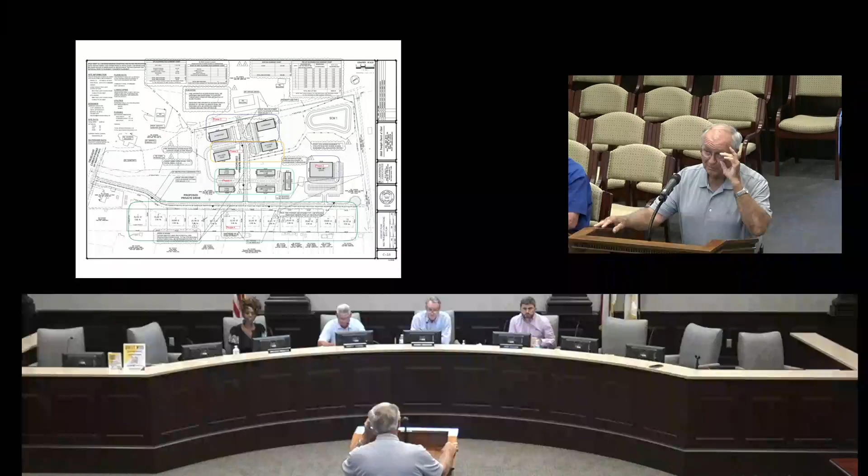Good afternoon, my name is Mike McGee. I have been a member of the Shiloh True Light Church for about 54 years, and a minister there for 21 years. As you can see, we have been blessed with a lot of property there over the years. We have purchased for use that we use a lot of it in the school that we have there. We have approximately 150 acres on our campus.

And we have been looking at it now for the last 3 years. So what can we do with some of this to help some families and children? That's the goal - what we can do to help somebody that doesn't have the same opportunity or doesn't have what some of us may have. And we started looking at it and we said, okay, what can we do to help someone like a single mom that maybe is homeless? And that's another thing, though.

Homelessness in families is way more than what we really think about. I'm involved with the Union County homeless shelter there - I built the shelter for them. And when we put that thing together, we thought we were doing a bunch. We had 7 units in that facility that would hold approximately 100 other single people, and we put 7 units in there for families. That has come up very insufficient because there's more families that for some reason may lose their home, or one of the breadwinners may get sick and they can't afford to stay in their home. So they've got to have a place to live for a while till we can help them get back.

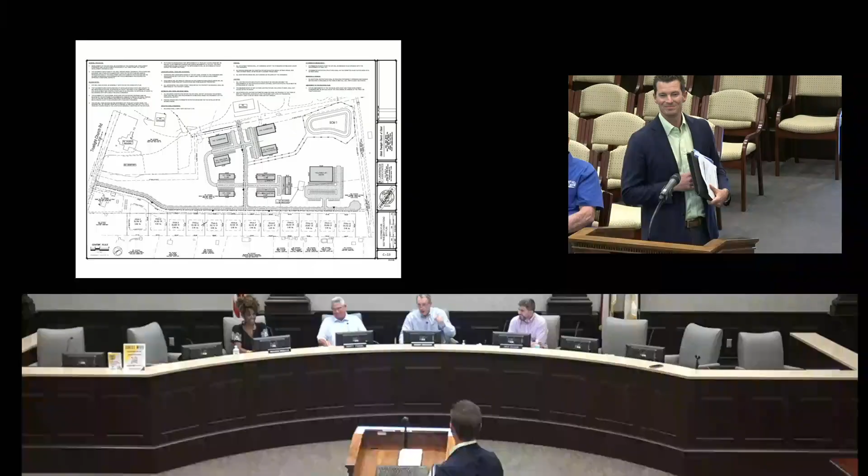Thank you. I have some questions, so I don't know if you want to start. Anything for the traffic engineer? Oh, I'm not a traffic engineer. Well, I think Mr. McGee wanted to come back up. Well, I do have questions for both. Did you want to speak before we get into the questions? You can ask both of us while we're here. Okay.

Well, since he's here, I did drive down there this afternoon, and I drove over the weekend down there. You're like 4 to 6 cars, 0.1 of a mile away from a 4-way stop. Crossing over that 4-way stop could be kind of dangerous because you're really close to that 4-way stop.

Another concern I had was that without a right or left turn lane at the 4-way stop, that could be a traffic hazard. We also have more communities coming in, on True Light street and right on the corner of Lawyers and True Light. GPS generally takes people that direction to get to 485. So that 2,000 or 4,000 threshold you're talking about, I don't know if that would be substantial.

Could you clarify what would not be substantial? When I drove down there were more cars than the numbers you stated, maybe around 5:45, so I guess that would be considered peak, and it was busier than that number, even at the 4-way stop crossing over going down towards Oxfordshire.

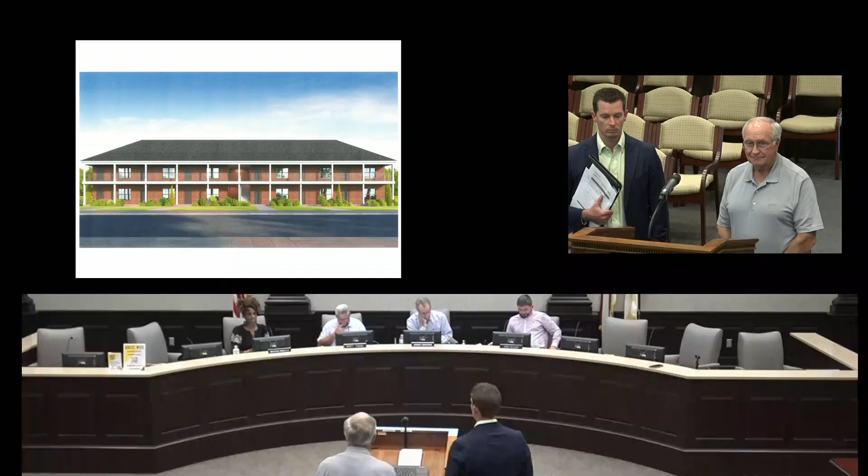Your campus. So those turning right into your campus, it will not impede traffic if I were going to 485 crossing over Willow Grove Mint Hill Road. It's a lot of traffic going across there. Based on the counts we're projecting, it would have very minimal impact to existing traffic on True Light Church Road. And we've got a new community coming in within a year, so it can quickly change, is all I'm saying. It can, sure. Okay.

One thing I'd like to say in ending, when you're talking about these turning lanes and decel lanes, that can cost anywhere from $300,000 to $500,000 extra to put in. I do developing also, some subdivisions, and that's what it's going to cost extra. If I was building a subdivision, you can pass that along to the people buying the lots there, and the homeowner eventually is who's going to end up paying for that.

We're not passing this along to anybody. This is money that has been brought in, that's been given to the church to use. I would certainly appreciate any thoughts you have along those lines - if it's needed, I want to see it. If the statistics say it's not needed, we'd certainly appreciate you looking at that, because it's extremely expensive. I could build one of those buildings basically for the money we're talking about to put out there on the road, and there's not a whole lot of people that's going to ever know the difference. It would be a little bit, but not a tremendous amount.

I thank you for your time, and if there's no other questions, I'll sit down. Well, you got any questions? Yeah, just a couple. Yes, sir. Mr. McGee, that's a great point. Yes, pretty expensive to do that.

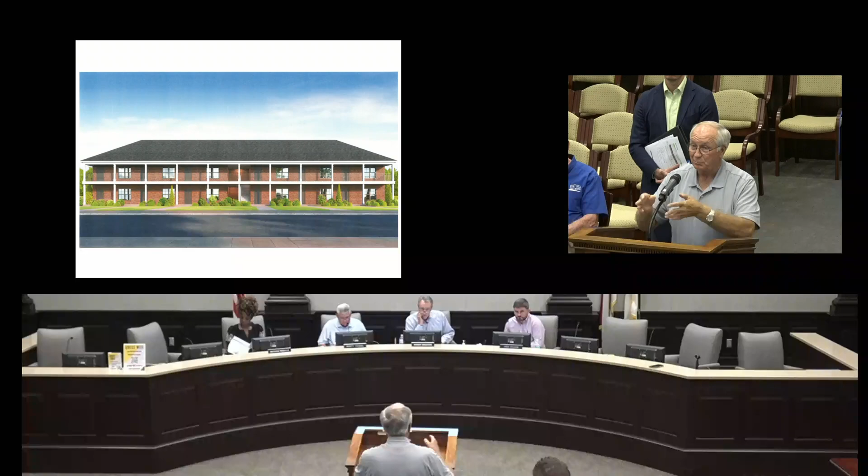We're just bringing that road in, and the guy was drawing it and said, let's just put these lots there. We may use them sometime, but that's not on the horizon right now—he just put them on there. Okay, because if there's any potential for this to be sold off, it changes the dynamics of everything—that's why I was asking. As far as I can tell, in my lifetime, I don't think there'd be anything else sold.

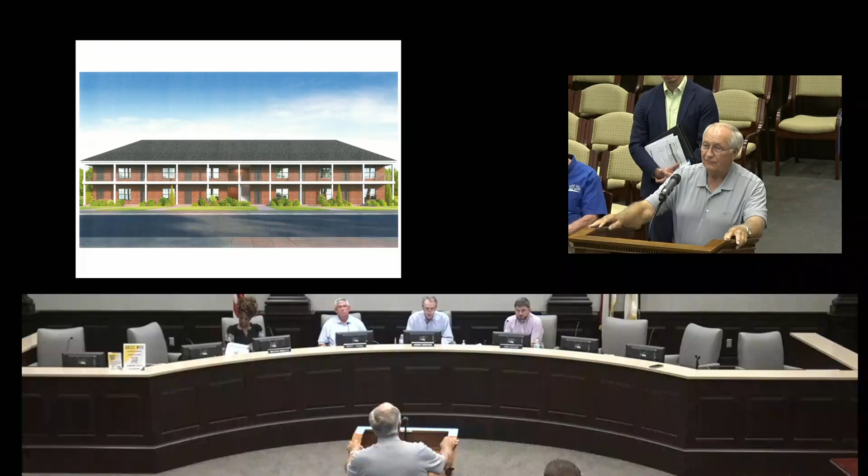But again, going back—is everybody going to get free water, or are you going to be sending them a water bill? If you do it on those lots, they would have individual meters. But the individual meters would require it to be a public road. And if it's a public road, now you're talking about a subdivision, which kind of gets back to what you said earlier about adding to the people buying subdivisions. But if we don't comply with those same requirements that subdivisions have to comply with, then we're doing a workaround around the whole subdivision concept.

Now you're talking about the building of the street. Well, if there's potential for these 12 lots to be sold off in the future, if they're individually metered, the first thing they've got to have—the water and sewer system has to be in a public right-of-way. So the roads have to be public roads.

Everything that I do normally has a public right of way on it. So I guess that's true, but which kind of gets back to what you had said earlier about subdivisions, they have to do it. It's commendable, it's a great plan, I think it's a great idea. Whatever has to be done on that to make it right, that will be done. So if it was a subdivision and had to do a right turn lane or something, that would be the same application.

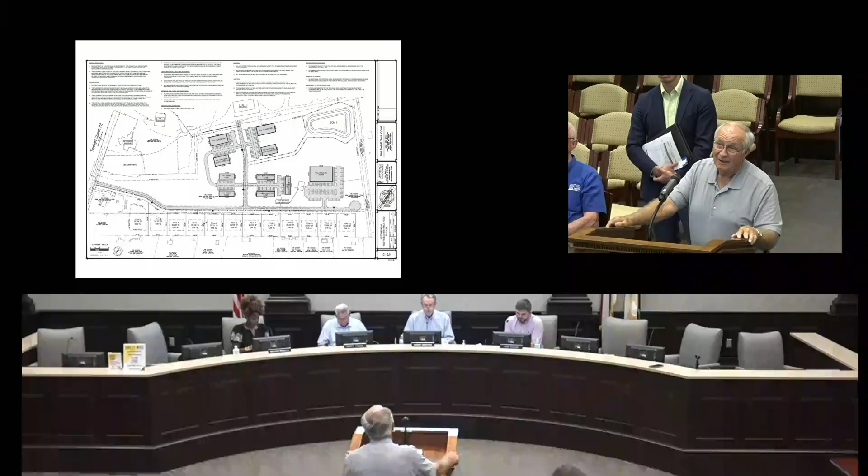As far as I'm concerned, you can say it's public, as far as that goes, if you leave those lots there. Because that was my understanding, that it had to be a public road. Well, I mean, you could own and already operate them all yourself and treat it like... I don't know, I'm trying to think of what would that be, John?

Well, what kind of a development would house people and let them stay, but it would be owned by one entity? It's kind of like free rental property or something. I don't know what you would call that, what classification that would put this in. Good question, I don't know.

But I do like this conversation because we definitely need to nail down if this is public or private. Would he prefer private, or is he okay with public, or to take off the whole phase? Because I already see some issues, since this went through all the review as a private street cross-section, which will never meet our standards. And they are also using a swale they may be getting credit for on their stormwater, for their BMP. Of course, if it's a public street, which sounds like that's what he intended it to be, now we're talking about a different type of street - street sidewalks, more asphalt, street trees, and all the requirements that the town has. We need to know for sure, the public or the private.

And I was going to say a couple other things about the subdivision itself. If it's public, that kind of answers the question. We just need to look at a new standard to make sure the county reviewed it, knowing now there's going to be curb and gutter instead of a swale. We need to make sure that's cleared up. And as far as the lots go, if this plan is ultimately successful, they would still have to come back for subdivision approval, even if it was a private street, even if he prefers to keep it private and the board blesses that.

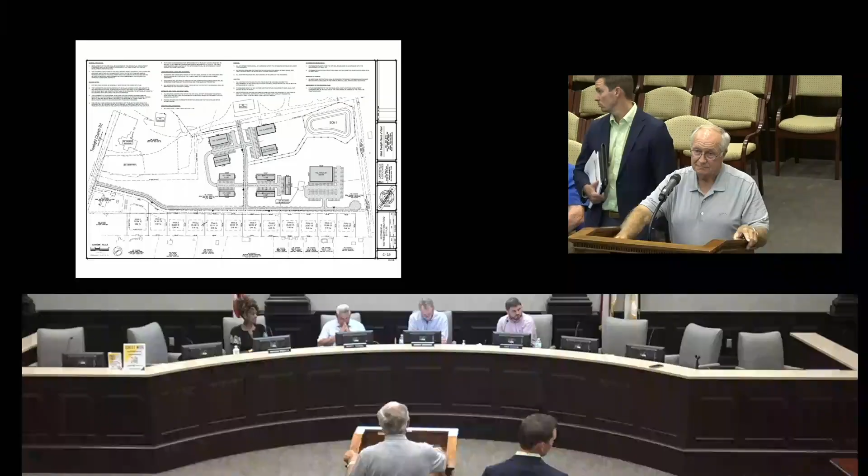Instead of saying phase 3 you have to do it, or phase 4 you have to do it, that's right, that's right. And that does allow staff the ability, because obviously they have to pull permits for phase 2, and we would know there was a condition adopted on this plan that says by phase 2 you have to put in turn lanes. So that would be our opportunity to say okay, no permit until the turn lane is done or bonded, or we'd work out something like that.

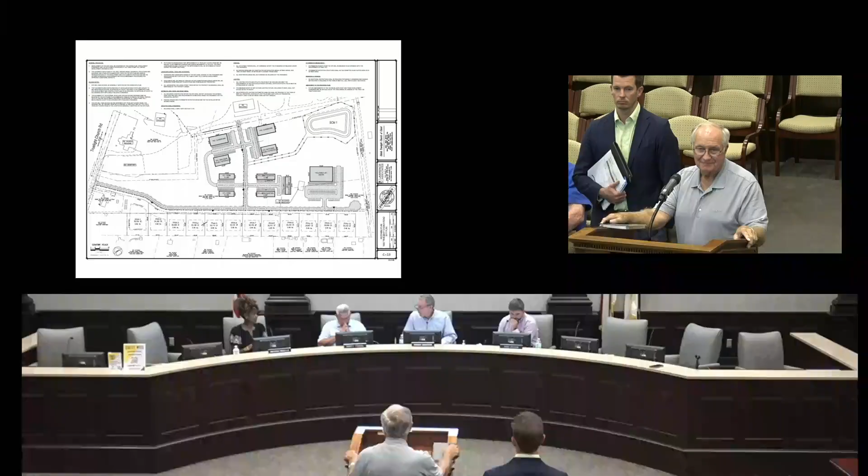Hopefully you know it's a great idea. I'm really trying to look out for you because I deal with these hurdles on a daily basis, and I don't want you to think you're getting something you're not, and don't realize all the challenges you're going to deal with down the road. That's really all I'm trying to do. I apologize, but I really think the right turn lane needs to go in, whether it's phase 1, 2, 3, or 4. I really think it's busy down there. It's a four-way stop right there, and it will impede traffic, even with the construction.

And that's just mine. Excuse me, I just wanted to clarify, because it would be an important point. When we're talking about the turn lanes, which driveway are we talking about? Going into your campus, so going on True Light Church Road, going away from Wilgrove Mint Hill Road, at that four-way stop you're like 7 cars down before you turn right. So if there are 7 cars driving on True Light Church Road, they will be impeded with one of your vehicles going onto your private street or public street, whatever. But that's going the opposite way.

So because the four-way stop is south of here, right, the right turn will be traffic going north. That would be pulling people away from northbound traffic. So what I'm saying is, if I'm traveling on True Light Church Road towards 485, that's where the turn lane needs to be. But at which driveway? The existing driveway, or whichever one you'll be using to go into your campus? Because there's two existing driveways, and then there would be a new one that would not be in phase one. Is that my understanding? That was what we were talking about earlier.

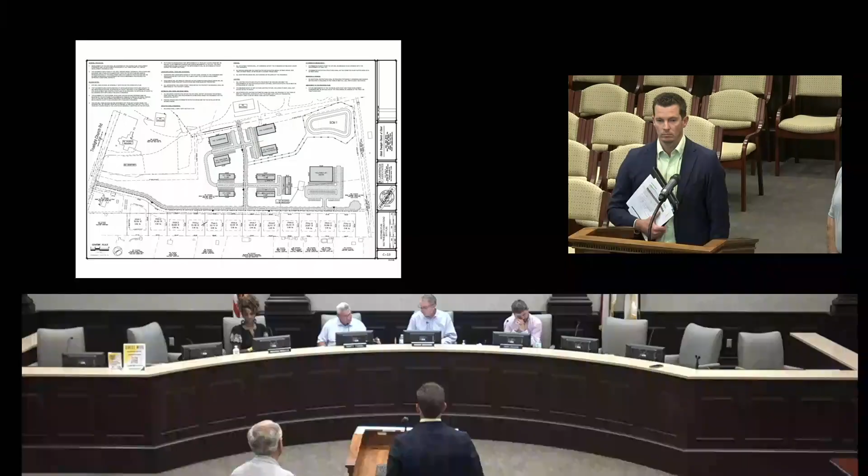I understand, but I have to look out for the residents. Currently in Mint Hill, I've driven there myself, down through there all the time. There's GPS putting people onto True Light going to 485 all the time, and that's where my mind is. I really think it's a great plan, and I'm not against it at all, because a lot of people are one or two paychecks away from that. But we also have to look at our current residents. Mint Hill is growing very fast, and it's just not fair for us not to do this now.

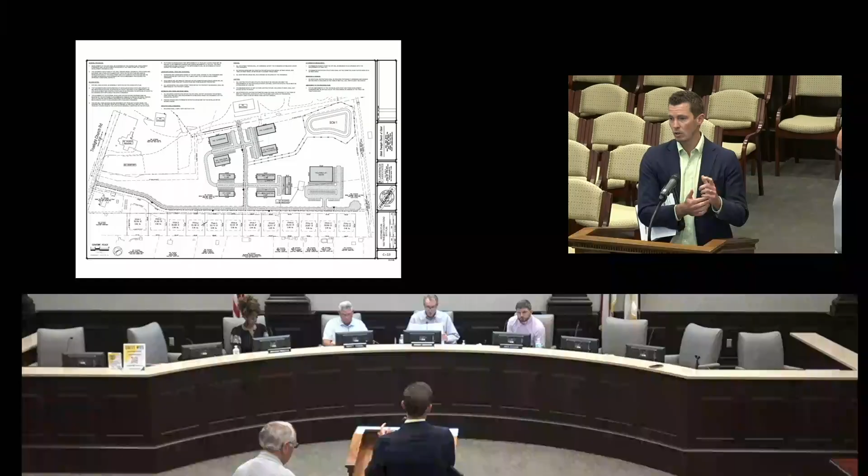I understand, I just wanted to put the numbers out there. One other thing - I've worked with growing towns, and when you see a plan like this, with it being a conditional rezoning, you could put conditions on what that use could be. So if you're concerned that approving this plan that says classrooms might not be the typical drop-your-kids-off-at-8am scenario, which would create a much different traffic pattern, you could work out conditions to address that. If the use were to change against those conditions, that protects you. I'm not an attorney, but I've seen land use attorneys work with boards to put conditions like that in place.

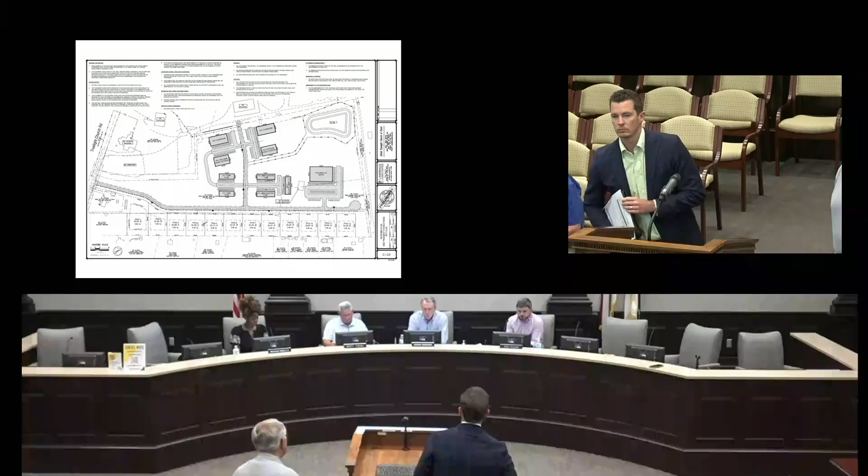What do we feel - can we come up with an approach? I guess what I'm thinking is it's getting really muddy now. Would it be better to come back after you've thought through this stuff about the public, private classrooms, all of that? Would that make it easier for the planning board to understand? Because right now everybody's finding things unclear as to what it is you want to do for the full build out.

Not that we don't like it, because I like it, but basically what I see as a real hangup is about the street out there - True Light Church. Putting the turning lanes in, because if you do that, it's going to take care of all these projects and all these buildings we're talking about. Yes, so that's really the point we're taking. Can I make a comment?

I think partially the intent here is the overall property - the conditional rezoning of the property. Just forget about the phases. What we're proposing is that 10 years from now, whenever the full development is finished, that need may arise regarding traffic impacts. I think for your benefit it's a good plan, but I would revise this plan to show just phase one and the conditional rezoning of the property relative to phase one. That would be my opinion.

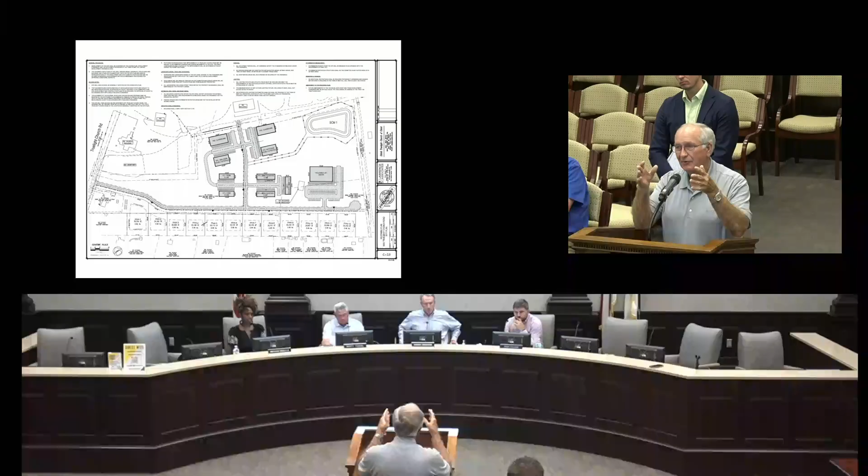I appreciate what you're saying, but it's taken me 3 years to get it to this point. I don't want it to take me 3 years again when I get ready to build another building, to come back through all the hoops I've got to jump through to get this. We've been dealing with this almost 3 years to try to get it to this point, and that was where we were instructed in the beginning - okay, let's figure out a way to go ahead, because these are buildings that I feel are needed. It may take us a few years, but I think we'll get there, and how can we get to that, and be good neighbors, and keep Mint Hill a good place to live and work and come to church.

I don't disagree - as a master plan, I think it shows the overall intent. But in my opinion, the question today is the conditional rezoning for what's going to be built, not what could be built. And that applies to phase one, and that's where all the questions are, right? Do we make it a public road or a private road? I'm saying just leave it as a private road, because I don't think this is basically just a driveway going in there - that will be built basically like a road. It's not going to be just asphalt put out there like a driveway, it'll be built as a road.

But if you ever wanted to make it a public road to sell these lots off, you would have to redo it and come back through subdivision. It'd have to go through all that, but the street's going to be built to probably the same type specs.

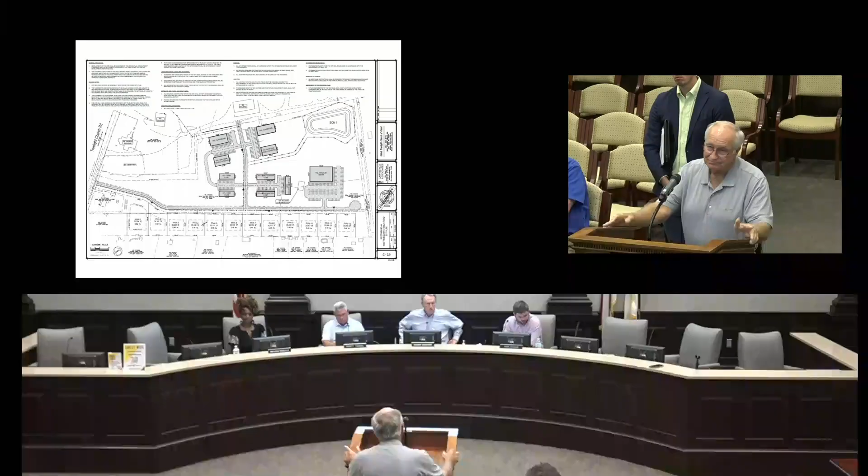Well, you're using roadside swales, right? I don't think roadside swales are an acceptable street. Okay, so that's fine, that's why I'm saying - I understand.

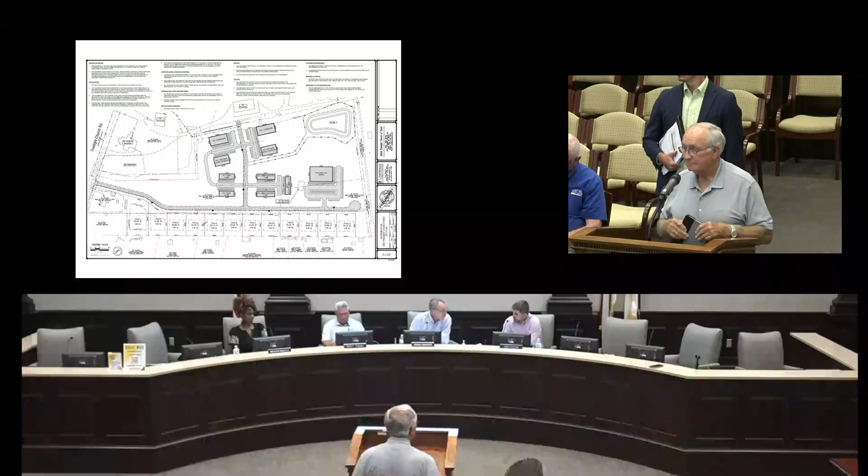Anybody else? Any more questions? Any more concerns? Do we want to try to compile a motion based on what we've said? Get favorable with a sidewalk required on property frontage and a right turn lane.

All right, so if we're going to do a favorable recommendation for phase one only, with a right-hand turn lane and sidewalk on the road frontage of True Light Church Road.

Can I say one more thing? Yes, sir. If you're going to say we've got to have the turning lanes, why wouldn't we just go ahead and approve the entire thing? Well, because if that's going to be part of that, it doesn't bring the left-hand turn lane in.

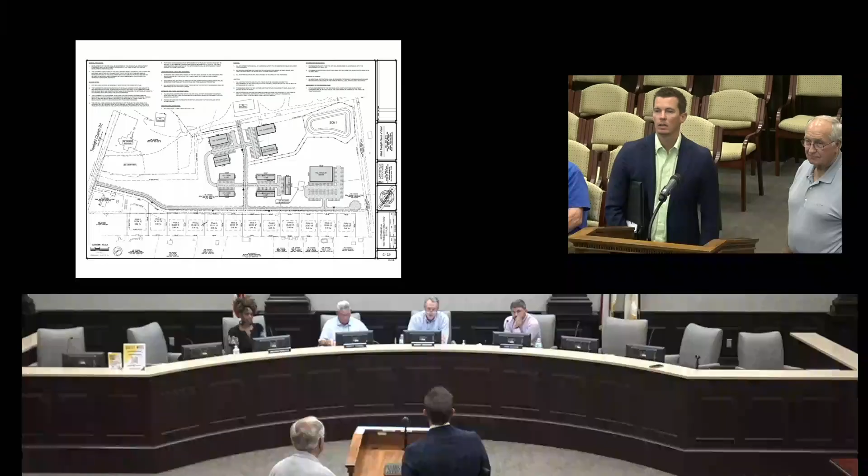Yeah, the left-hand turn lane, to your point earlier, can get rather expensive. That's why I was saying the right-hand turn lane is not, and I think the traffic engineer may be able to verify, a right-hand turn lane is not nearly as expensive. It depends on the utilities and right of way, but typically for a left turn lane you have to shift the through lane and taper over in advance, both ways. The right turn lane, you just build the right turn pocket, so typically right turn lanes are less expensive - it's just 150 feet long with a taper at most. That's right, so that's just some asphalt.

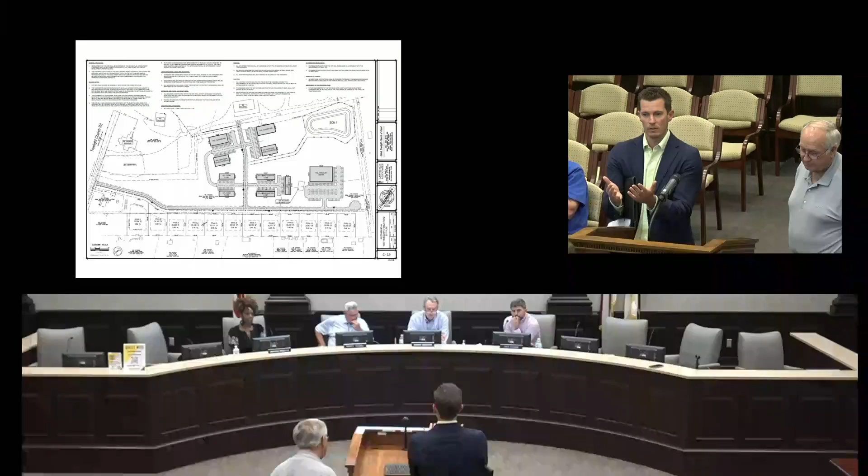I will say about the left turn lane, the numbers don't show it being warranted, but if we were to put a left turn lane there in the future, that would create an issue at the existing driveway - the length of that left turn lane and the taper would actually be around the location of the existing main driveway. So you'd be turning in and out of the existing church driveway through a transition taper, which is confusing for drivers and can actually be less safe. So I will mention that.

But I think to your point, if we just approved it, that becomes kind of kicking the can down the road. I want to give them a favorable recommendation, but I don't think we can give a favorable recommendation on the master plan as it is. If we back it down to phase one, at least in mine and Rhonda's mind, that doesn't get rid of the right-hand turn lane and the sidewalk. Now how that equates to the left-hand turn when you get to phase two or phase 3, 4, 5 or whatever.

I don't want to just say we're not going to give a recommendation and send you back to the drawing board - I don't think that's right either. Obviously phase one is the first piece you're looking to do, which would have an impact to the town immediately if you were able to get started on it. So, John, I'm just not sure how I want to word the recommendation.

So you made the motion? I'd like to make a motion. Okay, I can make it if you want - with the right turn lane and the front sidewalk frontage, for phase one only. I just want to be sure we're getting everything in the language that needs to be there. So it would be simple enough to say: a motion for a favorable recommendation for phase one with a right-hand turn lane and sidewalk on True Light.

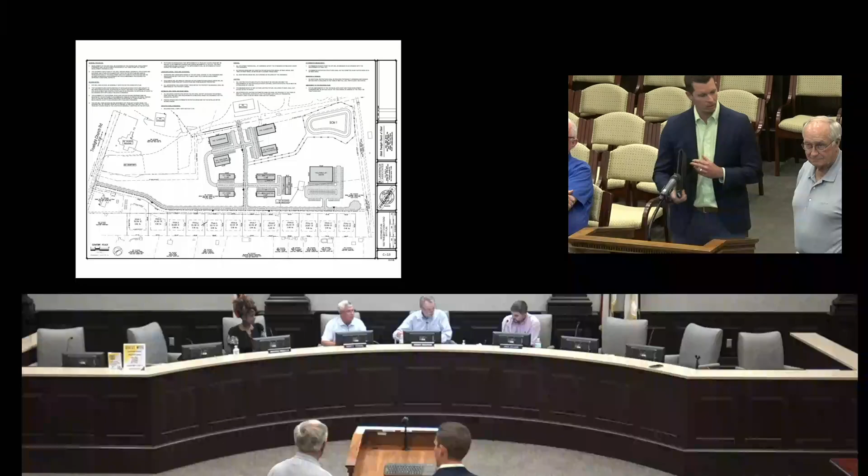Does he need to read the first part and then tack on the conditions? Yeah, if we can clear that up. That's the motion. Do we have a second? I'll second it.

Further questions? Got a motion for... let me read that. No, we don't have to read that. Do we not need to read this? Yeah.

So now you're passing a recommendation on. The planning board will always include that consistency statement recommendation. But do we have to read the consistency statement in? You can kind of at least breeze through it and summarize it. You don't have to read all of it.

ZC 25-5 appears to be consistent with the adopted land use plan, which designates the subject property as part of an institutional campus. The land use category supports a mix of functions related to complementary uses, in this case associated with an existing church campus.

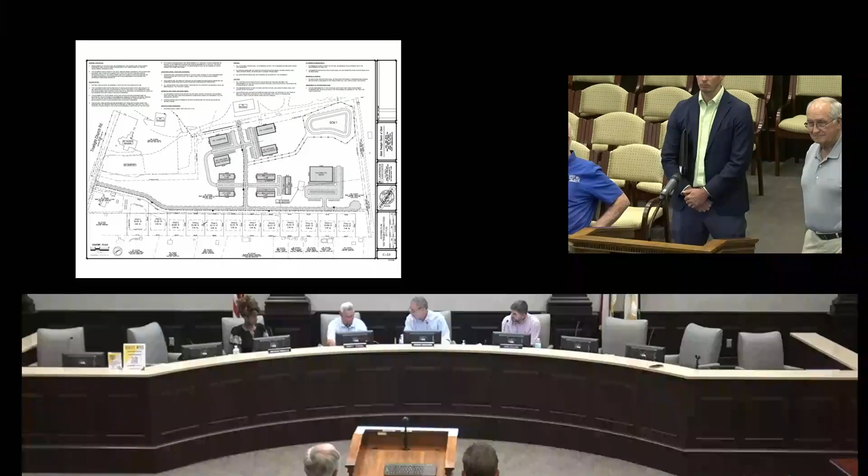So you're making the motion for that with the conditions of the installation of a right turn lane on True Light Church Road and a sidewalk along True Light Church Road for phase one only. Correct.

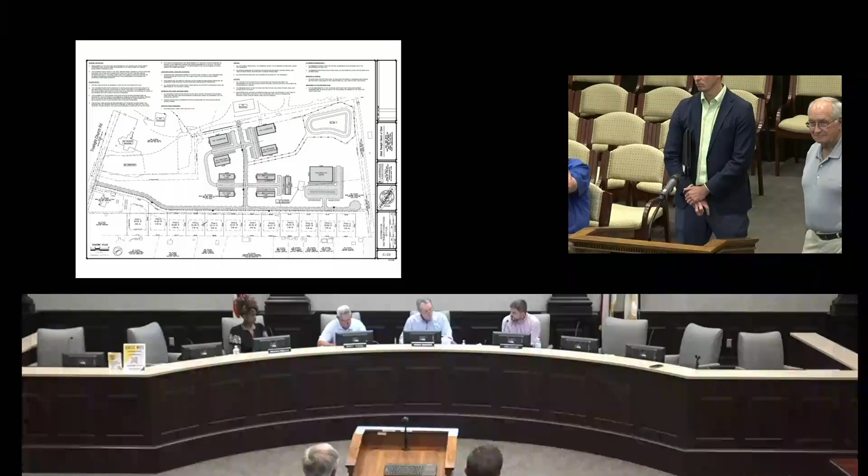Having said that, I guess now we have to vote. All those in favor? Aye. Those opposed? Passes with the favorable recommendation with the conditions stated. Okay, thank you.

So now we move on to the next one. We have the discussion recommendation on ZC 25-7, filed by Nicholas Bradford, for conditional rezoning to allow an existing building to be used as a bank with drive-through service for property located at 6849 Matthews Mint Hill Road, tax parcel number 135-38175. You can state your name and address, please.

Hello, my name is Nicholas Bradford. I work at 1520 South Boulevard, Suite 200, Charlotte, North Carolina. I'm representing our client PNC Bank, regarding the property at 6849 Matthews Mint Hill Road. It's proposed to be a retail bank with a drive-through ATM.

Can you go to the next slide, please? The location of this site is just down the road from Town Hall, right across from the library near the Harris Teeter. Currently it is a vacant fast food restaurant; it was previously a Wendy's.

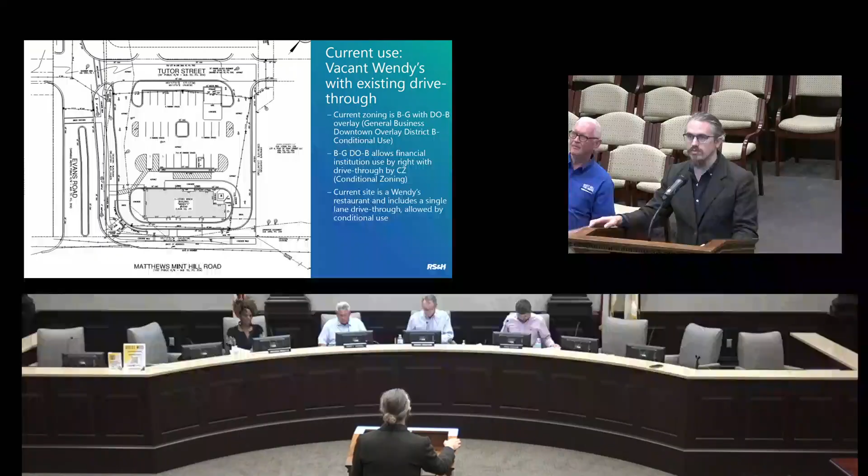Our proposed site plan will have the same transaction point on the building as before, but instead of a drive-through window, it will have a drive-through ATM and an after-hours deposit. The cash transaction window will be removed and filled in.

We will provide landscaping in what is currently the portion of the drive-through that faces Highway 51. Cars stacking would be on the rear of the building, on the parking lot side, going back towards Tutor Street. We don't anticipate more than 3 or 4 cars typical stacking at the drive-through for the bank. That's generally what we see.

Architectural changes to the building would be minimal. We're keeping the brick facade typical of the character of downtown Mint Hill. We would be repainting the awnings, and refinishing any exterior metal pieces like trim, downspouts, and bollards that are rusty or in need of maintenance.

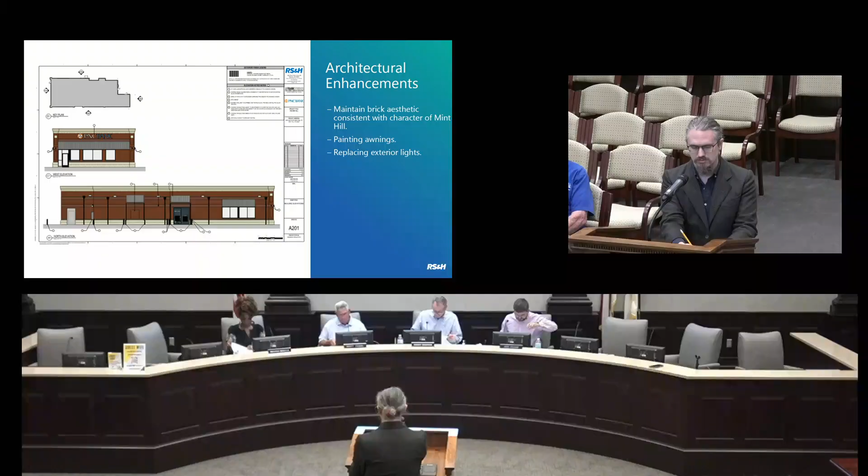I would just recommend if we could remove that, if it's possible. The other thing on the site plan is the pergola structure out front - this may be nitpicky for the town, but the columns have big W's on them. I'd recommend swapping that out for either an MH or a PNC logo. That's something we are talking with the landlord, the developer, about. He seems favorable to it as well, so we can look into that.

I don't think I have any questions. Thank you, George. Rhonda, would you like to go?

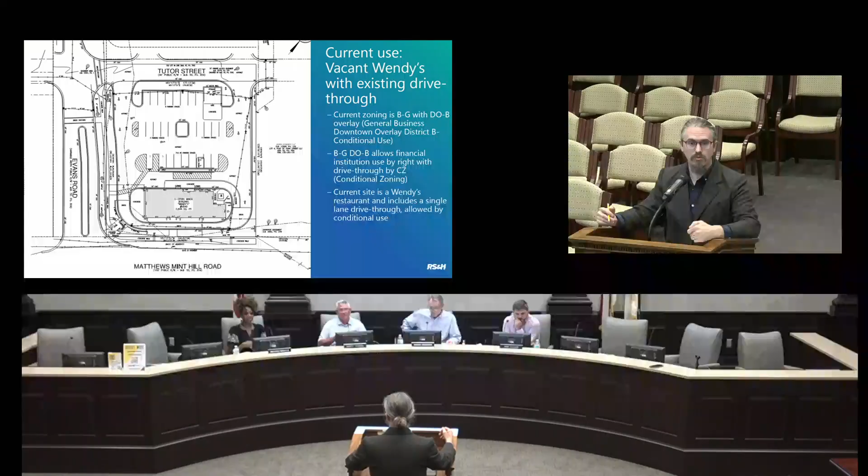I just had a question about the drive-through. With the ATM, it's really tight going through there when it was Wendy's - will you keep it exactly the same or open it up a little? If you ever go through that drive-through, you cannot get out. You're talking about the portion that goes around the building facing Matthews Mint Hill Road? That portion of the drive-through will be going away, and we'll be replacing it with landscaping. Yes ma'am, there's no bypass lane there currently.

Currently there is room for a bypass lane. If you're looking at the landscaping plan, the planting plan, you can see north of the building there is room for the drive lane and also a bypass lane, between the building and that concrete strip. That's our plan, since the car stacking is going to be so much less than a Wendy's would be - we're looking at 3 or 4 cars. We're looking at stacking on the parking lot side of the building and then having a bypass lane there as well.

That's everything. Thank you, Rhonda. Scott? I don't have any questions.

So I guess mine kind of piggybacks off of Rhonda's - the parking lot itself, y'all are leasing this building, correct? Yes sir. So the parking lot that's out there, what will it serve? The parking lot that's on our parcel would still serve the bank. Okay, so that's quite a bit of parking. I don't think it's excessive, but okay, so you'll have the access.

Are they going to restripe any of that to help guide traffic? For the drive-through, yes sir, there will be restriping. Currently there is some striping delineating the drive-through and a bit of a bypass lane, but we would be fixing that and showing the striping going around and curving back up towards Tutor Street to capture the cars. Okay sir, that's really all I had.